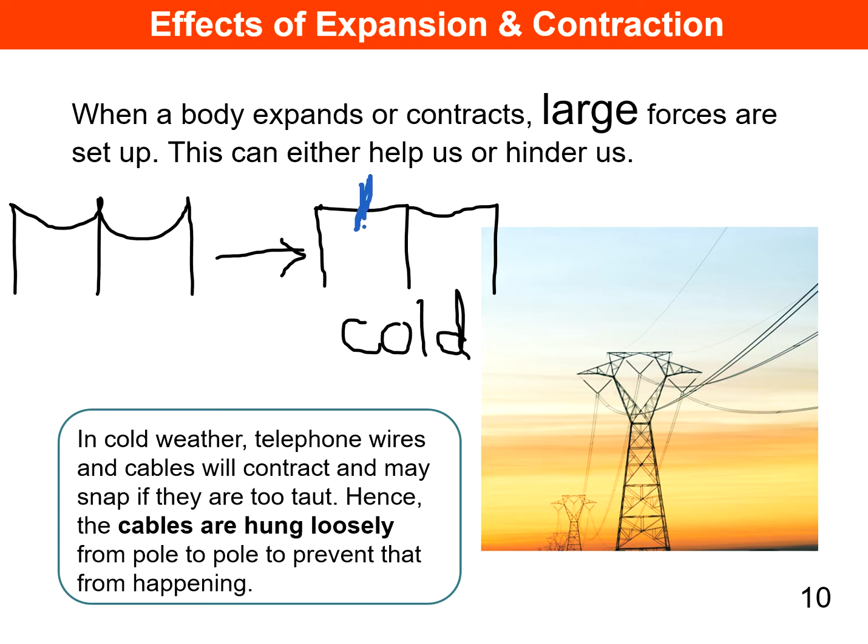Okay, so this is another common effect. Our MRT rail tracks or any train tracks, you notice that they will have gaps like that. They cannot lay the whole piece of metal as a continuous track, because if that happens, when it comes to a very hot day or summer, then the tracks may just expand any way they want, and the other side may expand another way, and then this can cause the train to derail.

So when the tracks become like that, we use the word buckle. We say that the tracks are going to buckle because there's nowhere for them to expand. So having these little gaps will allow them to fill up the gap when they expand, and that still keeps the track straight.

And again, I think this is quite common. If you go to the school ground next to the playground or at the car park area, you will see that the tiles are laid like that. So then on a hot day when the tiles expand, you see the spaces here that allow them to expand without really banging into one another, and so there's no cracking.

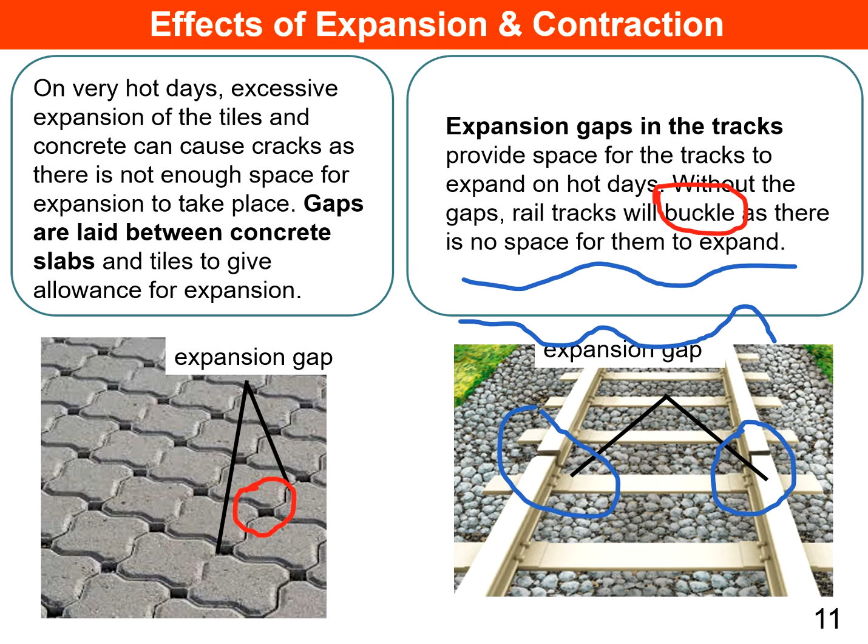Now this can be a very big issue. So therefore, sometimes on roads, a very long stretch of road, you see all these gaps so that we can still travel very smoothly. At the same time, we still allow for expansion. You see, this is one part of the road, this is another part.

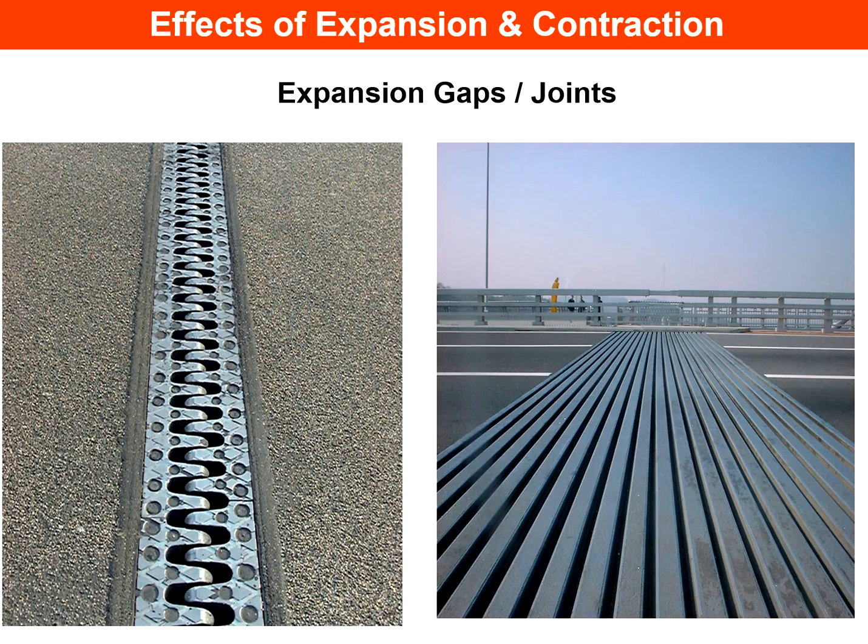And on hot days, when this part expands, it will push, and this part expands, it will push the other way, but we still have gaps for them to close up. So the whole stretch of road can still remain very even. We want the road to be even. Now this is what's going to happen when the road is uneven.

So can you see, these are real pictures taken from the internet, and these are real cases where the road actually buckled. So you see, when you don't give them space to expand, this is what's going to happen. The expansion forces are very great, and you can't really stop it. So the only way that the road can find a place to expand is upwards. So then this can cause a lot of danger to the drivers.

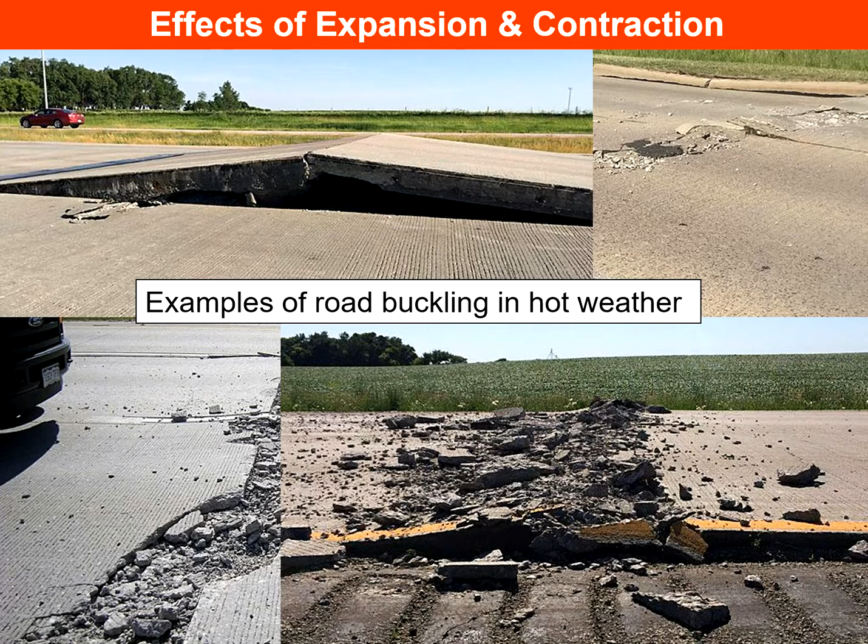And this is a real case again. I think they would have put in the expansion gaps, but they may not be enough if the weather gets really hot. So you see, they expand in the way they want, and there's no space, right? So they'll expand outwards. This is the only way for them to expand. And when that happens, your train can derail.

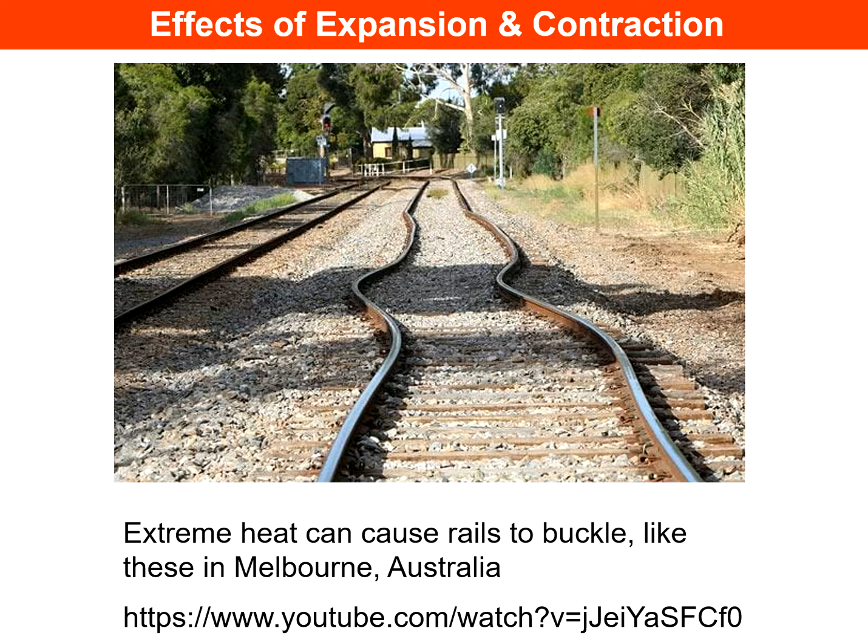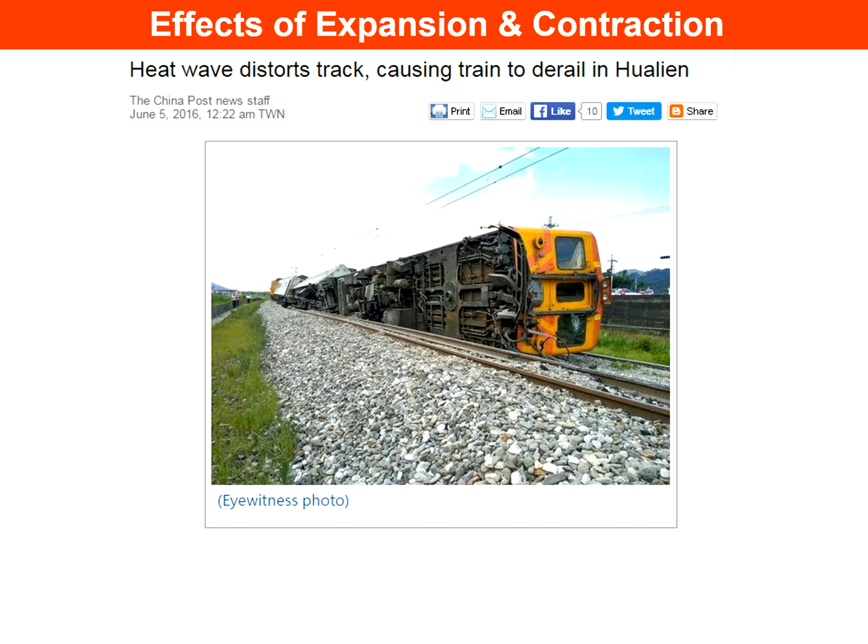And real cases have happened, like this is in Hualien, Taiwan, 2016, when they had a very hot summer. Sometimes if it's just a little bit of a curve in the track, the train can also derail. So that can cause a lot of damage to property and lives.

If you notice, the lab apparatus that we use have the word Pyrex written. Now, these are not ordinary glass. Pyrex glass actually expands just a little, and that's important because if you have normal glass, sometimes this will happen.

You see, when you put in hot water, the inside of the glass would want to expand. But remember, glass is actually a poor conductor of heat. So for the heat to travel to the outside, it takes some time. So the outside of the glass is still cold. The inside is hot. So the inside wants to expand, but the outside is cold, so the outside hasn't expanded.

So that caused a strain, and this strain will then cause the glass to crack. So you need a special glass to make sure that this expansion is not too much so that the strain doesn't cause it to crack. So in our lab, we use Pyrex glass, and Pyrex glass have that special property.

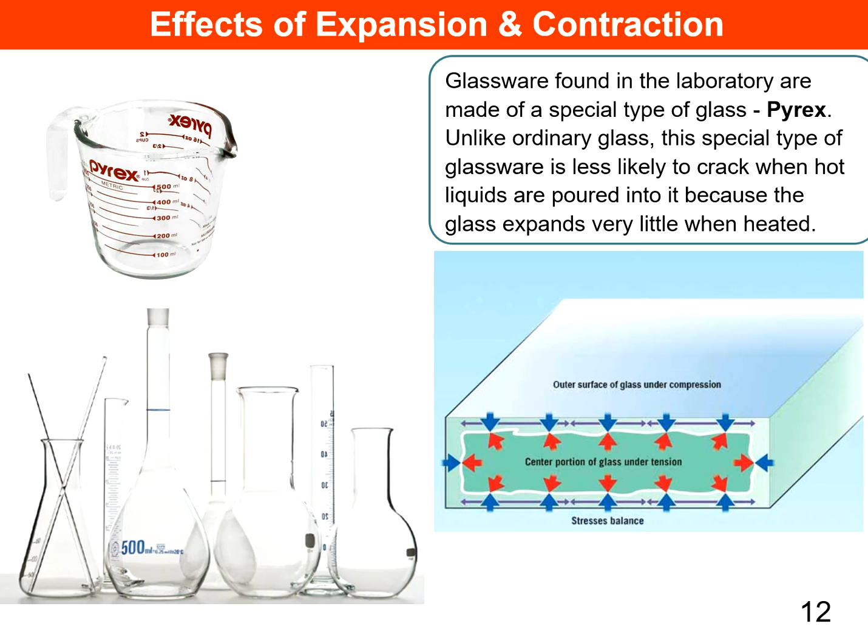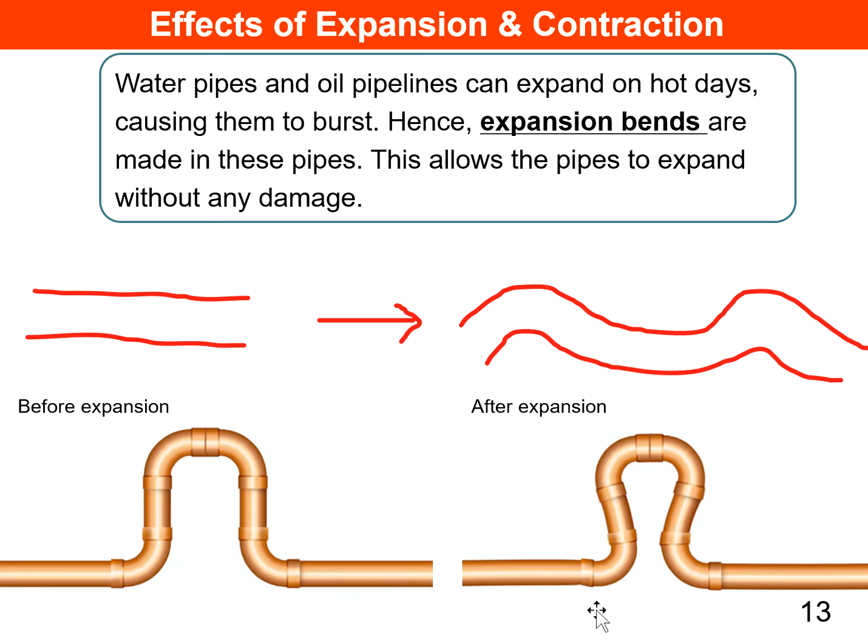So if you look at the real life example, so there you are. You see, so these are expansion bends. So it doesn't expand here. So if you expand anyhow here, it can actually cause the pipes to break. So we give them the allowance to expand properly here without causing much damage.

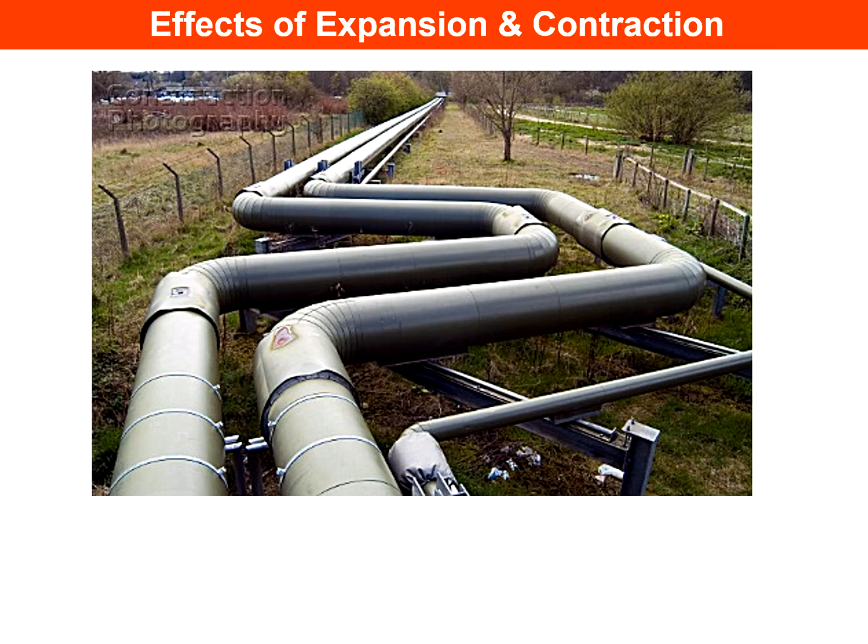Okay, sorry for the aeroplane.

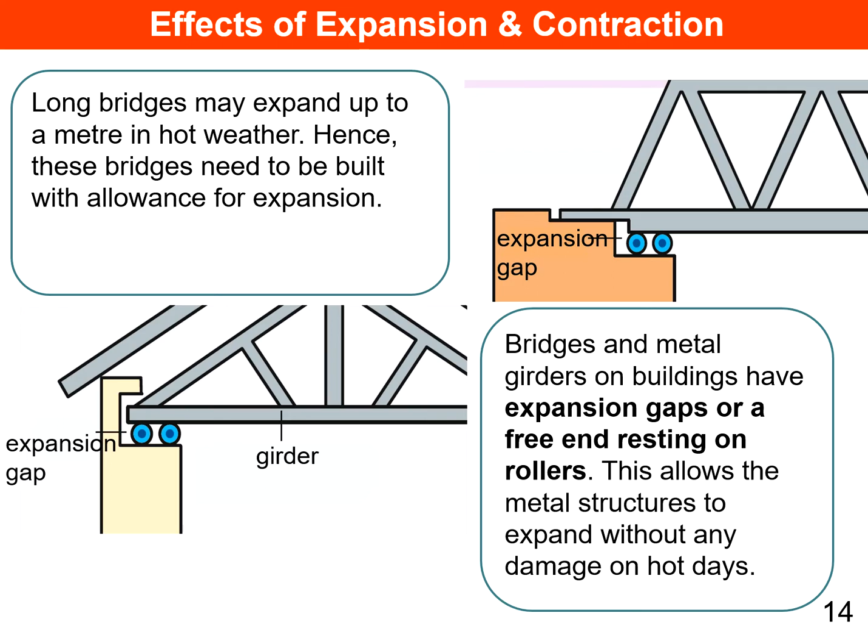Okay, so on a hot day, the bridge is going to expand, but because you have given space and the wheels, the expansion can happen in a safe manner. Let's take a look at the real roller. So I don't know whether you can see carefully. This is one part of a bridge.